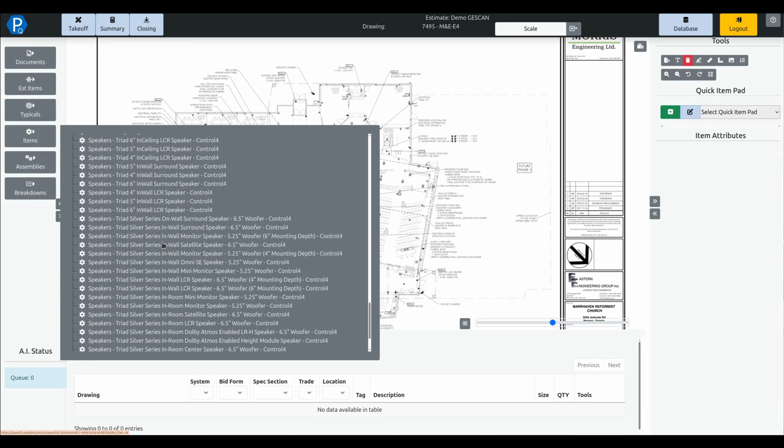And this comes tied in with Gescan pricing, tied in with labor units, all of that sort of data that you need to put together a comprehensive estimate. And we are continuously adding to this. So we just recently, for one of our clients, loaded up a whole bunch of new speakers and all that kind of stuff for home automation in here. So again, if there's anything missing in here, we're happy to plug things in for you, and we don't charge our clients for this. You can customize anything yourself in here.

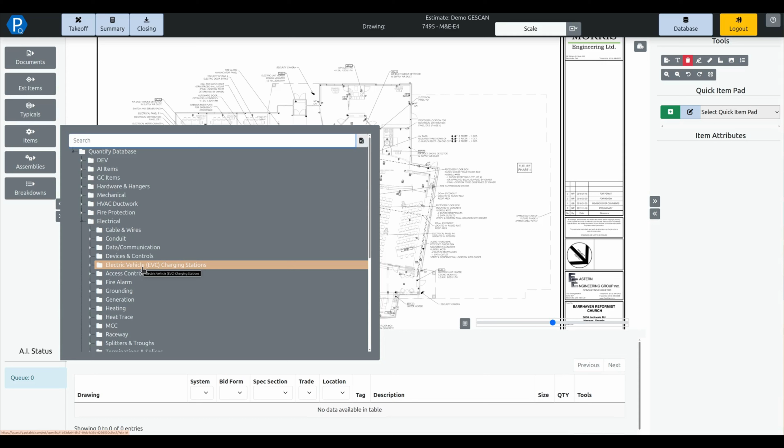Anything that a contractor does in here is locked to them. Nobody else can see it or touch it. If we load something in, it does go to the global database. So this is continuously expanding. EV, solar, all of that is being wrapped into the platform effectively in real time. The same goes for our assemblies. Our assemblies are formula driven. So if you know a little bit of Excel, you can build very powerful assemblies.

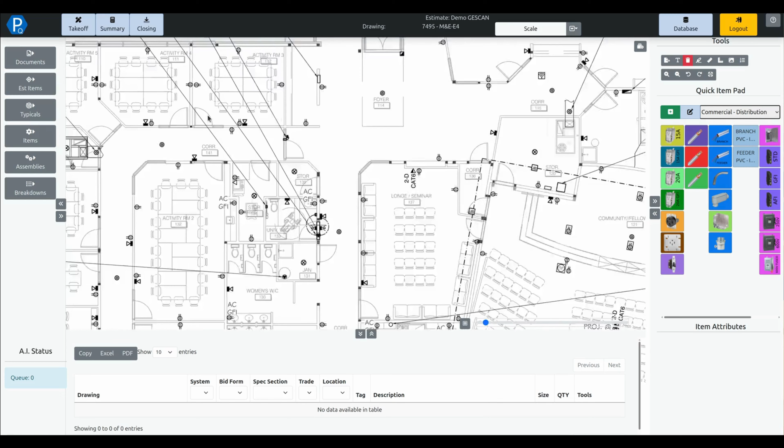On the right-hand side here, we've got our quick item pads. These are shortcuts into the items and assemblies databases and are there to speed up your takeoff. And so to get some information in here, I can click on one of these buttons if I want to go and count these 15 amp receptacles. And it's going to ask me some questions. What do I want this to be in the platform? I can select the gauges here. I'm going to put a 10-foot whip on this. And then I'm going to highlight this. And I can go and manually count these.

If I really hated my life, didn't want to spend any time with my wife and kids, I could spend my whole day counting these widgets. I personally don't find that very fulfilling.

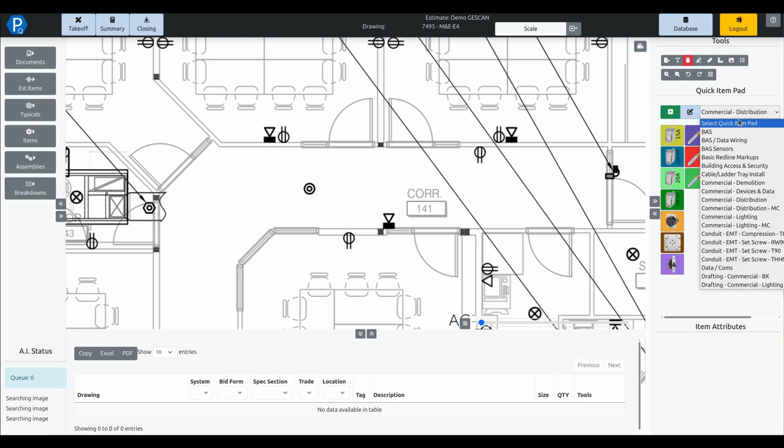In here, we have added in our AI. And we've been working on improving this in a number of different ways. But I can click on this little yellow icon here, and I can simply go and highlight this receptacle now, hit commit, and that's going to send it off to our servers, and they're going to take over and start doing the counts for me. While that's going on, I can queue up other information here. If I needed to take off these fire alarm strobes here, I can send those in.

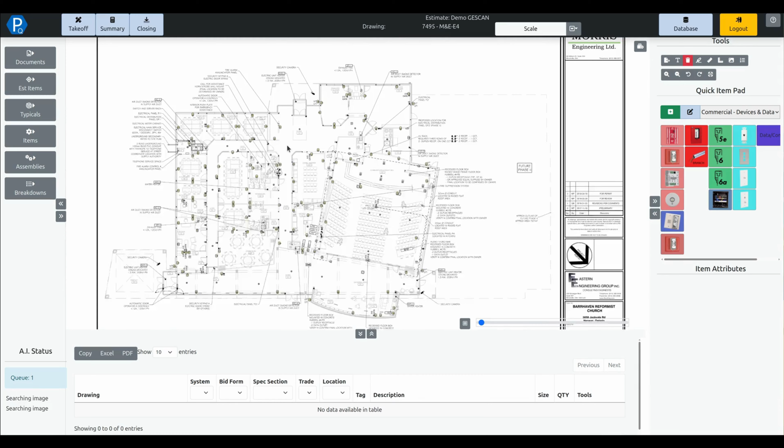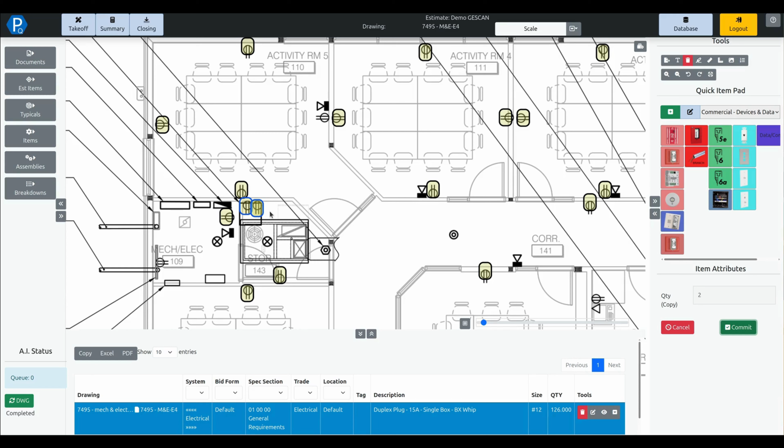And it's basically going to just crunch through until one of these is finished, and then I will get a green refresh button here. When I receive that, I can click on that button, and it's going to reload the drawing and show me everything that it's picked up. It's not 100% perfect, but it's there to speed up the estimator. Anything that is missed in here, I can simply right-click, copy, and paste this in. And so when I paste that in, I'm able to very quickly capture anything else that is needed in that project. And we can see here that I've got the other fire alarm devices all captured in here.

What we have in here to break out your estimates, we have these breakdowns here, and these become very powerful depending on the nature of the estimate that you're doing. Now, this was pre-populated with the default template that I used to open up. And so I've got different systems in here.

Now, in my audit trail here, I've taken off some distribution, I've taken off some fire alarm, but I've never really assigned these to any systems. I can go back and I can fix that now. So I can right click and reassign this and put it into my fire alarm system. I can do the same thing for this one here, reassign this and put it into my distribution. Now, usually you would organize this, if you excuse me for 1 second.

Ha, a little bit of allergies kicking up there.

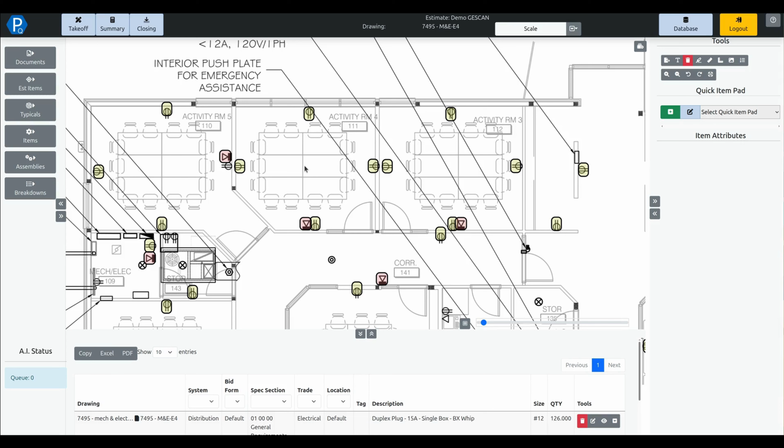Usually you would organize this as you're doing your takeoff. And I'm not diving into a ton of detail on this, but what I do want to talk about is those instances when you're bidding and the contractor, the owner, somebody comes back to you with an addenda. Usually it's 24 hours before the job closes, and they say something like they want to see one of these rooms broken out.

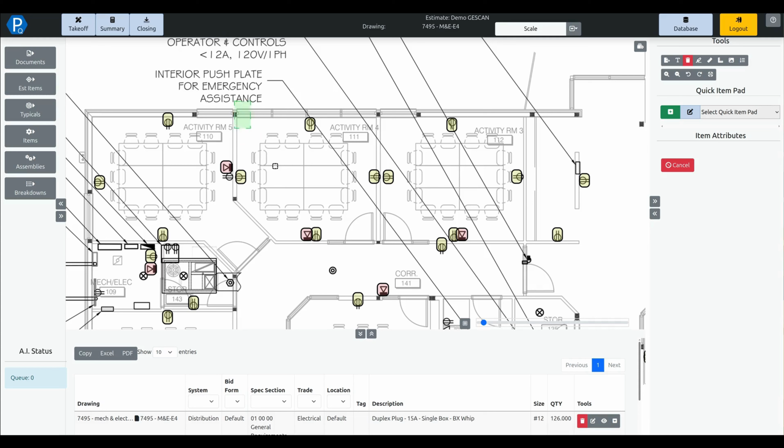And so if the owner wanted to see what activity room 4 was worth, we have a new feature here where I can go and add in a location for that. So I'm going to call this activity room 4. Save that. And because we are very focused on the documentation, I can right click on this and I can use our multi-select tool. This is a new tool that we have, and I can highlight everything that's in that room. And then I can right click on this and select reassign. And in this case, I'm going to select my activity room 4 breakdown.

And when I do that, the system is going to go through now and it's going to break out all of the associated lines of takeoff so that I now have this new activity room 4 breakdown. And this becomes incredibly powerful again as we're going through these kind of detailed estimates with that ability to react very quickly and see what's in that room, what's associated with just that, as the owners are sending us those breakouts. It doesn't happen all the time, but it can happen. And when it does, it's very, very painful to try to break that sort of information out.

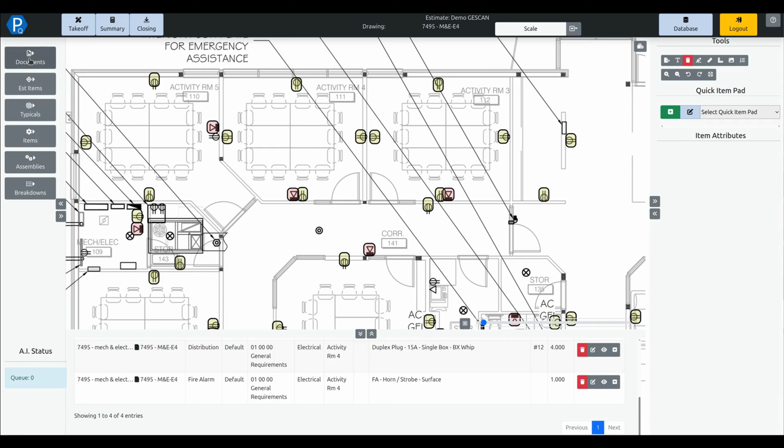On the drafting side of things, we've been improving the drafting module in the platform. So we have these drafting quick item pads in here. We've significantly expanded the number of quick item pads and what you can do with those. But effectively in the drafting, if you're in design build here, you'll receive a floor plan and basically be told, give me a full electrical price for this. And this can be done with averages, square footing, that sort of thing. But it's really hard to communicate and minimize risk when you're doing it that way.

So what we have in our drafting module is this ability to place the symbols right on the drawing, make allowances for different things in here, click commit, and it's going to put those symbols on the drawing. But it's not just putting symbols on the drawing, it is tying in all of your information, everything that you need, pricing, labor, everything that you need to install what is on that drawing. And it is tied together. So when I click on the row in my audit trail, it's going to highlight everything associated with that.

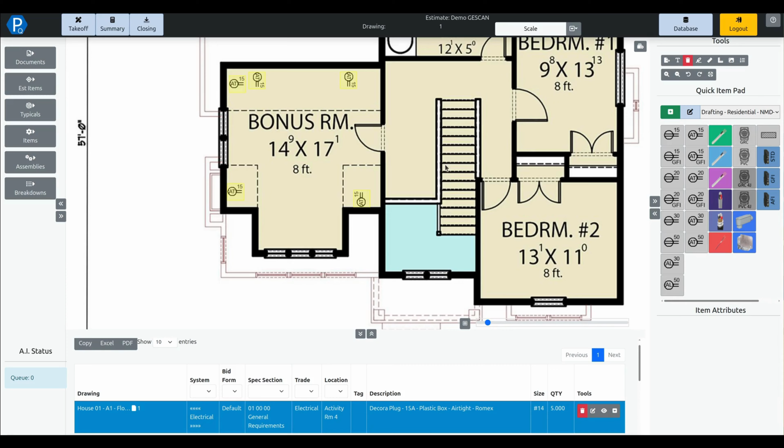What we've also been adding in here is the ability to put a legend on these drawings. So this is a very new feature from a month or so ago, but in the top right, we have this add a legend to the drawing. And when I click on that, it's going to ask me where I want to put it. I can put it anywhere, and then I can move it. But what this lets me do is place an interactive legend on the drawing. So this is going to update if I bring it down here a little bit closer so that we can see everything kind of all together here.

If I'm adding some lighting in here, for example, I want to use my drafting one on this. Let's throw in some light fixtures. I'm going to turn on a grid here, and I'm going to throw in some downlights. They'll be 4-inch downlights, and then I want to call these type A's, or I can even say bonus room, that sort of thing, something to identify these. And then when I bring this over, I can place these lined up to the grid into my drawing here.

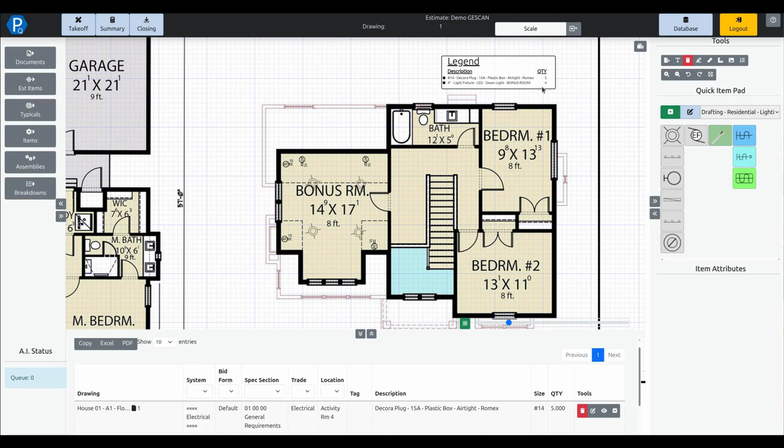And then when I hit commit, it's going to automatically add them into that legend up at the top, along with their quantities. So when I go and share this with the client, whether I'm doing a large design build or something smaller, residential, I can very clearly communicate the information that I need for those clients. We are also putting in markups, red lines, all of those sort of things in here.

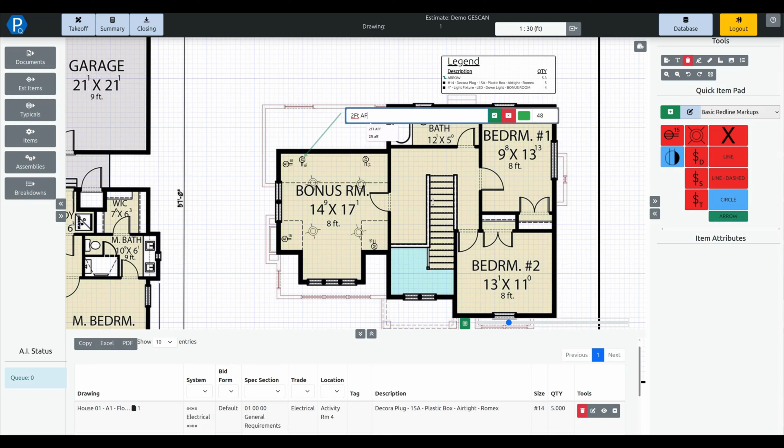So if I come in and take a look at our new redlines markup capability here, I can add in arrows and point those to wherever I need to, add in annotations in here, 2 feet above the floor if I need to tell them that for that receptacle. And we're working on actively making this a lot more interactive for communicating the information that was in the basis of the estimate. And so that's on the drafting side.

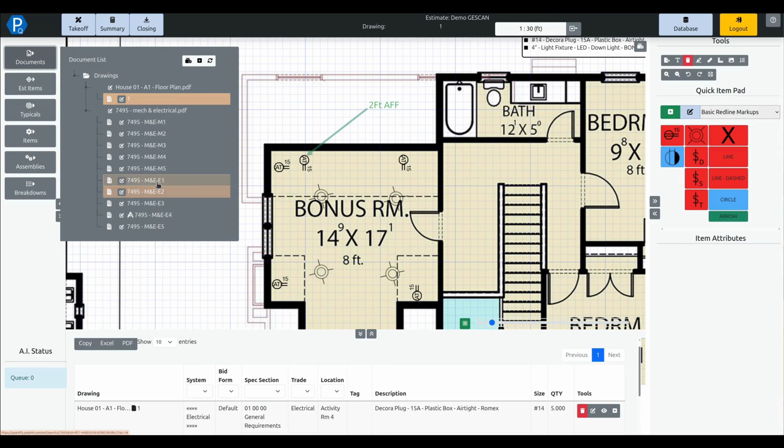Going back to things like lighting. So if you're on a commercial project or if you're on an industrial project and you get a cable schedule, those sort of pieces, we have a new feature built into the AI here so that we can use that to extract data out of tables in the documentation.

So what I'm going to do here is I'm going to go after these light fixtures, for example. I'm going to hit a new folder in here. I'm going to use my typicals for this, and I'm going to call this my light fixtures. So I have a folder in here. This could be a cable schedule. I could call it my cable schedule. Anything of that sort of nature.

And now I can use this button up here to extract a table from a document. This can be drawings, specs, whatever I have in here. And I can simply highlight this table here, tell it that I want to call this a light fixture, and send that off. And that's going to send this table over to our AI, and it's going to start pulling this apart for us. And it's going after the tag list here. So again, this is awesome for light fixtures, equipment, componentry like that, cable schedules, etc.

And when I refresh this, it's going to show me everything that it's found. There's a couple in here that it missed. I can add those in myself. But what I have in here now is that preliminary list of tagged items. And I can now go and start to immediately take this off.

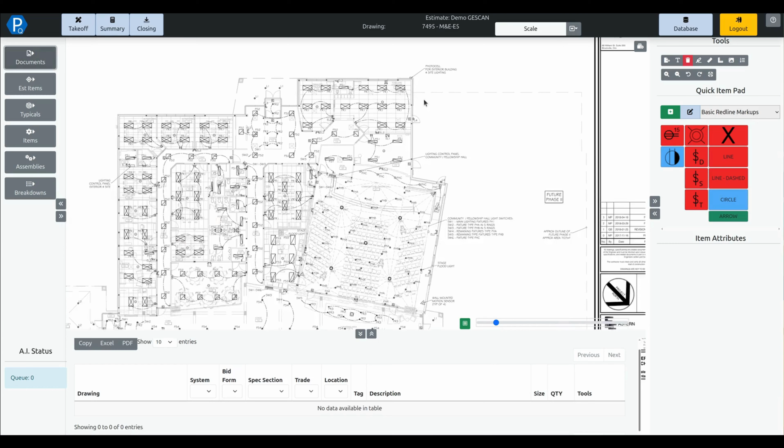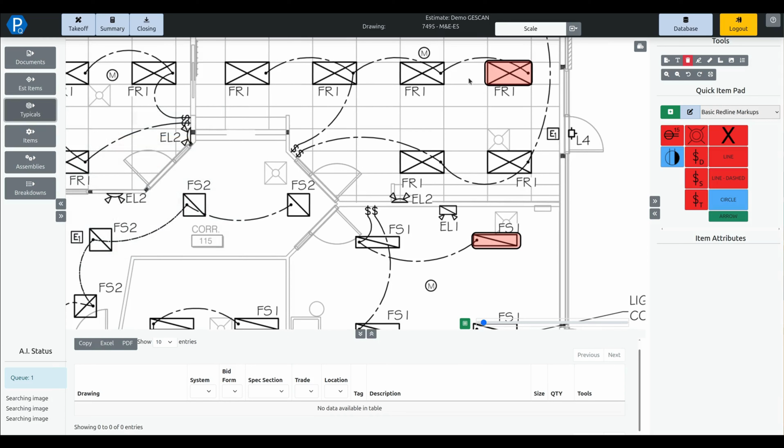Since I'm doing lighting here, I can dive in here and I'm going to use the AI to count these for me. I'm going to start to send that over and the AI is going to start pulling this apart for me. While that is going on, I can queue these up, but I can now go and take a look at one of these. So this FR1, for example, that we're looking at here, it's a 2x4 light fixture. When I go and right click on this and edit the typical, I have my tag in here.

So what we're doing is we're trying to get that tag list out to Gescan as fast as possible so that they can start to get the quote going for that. So that's kind of our A materials quotes that we're going out for with this. And we're trying to speed up that process.

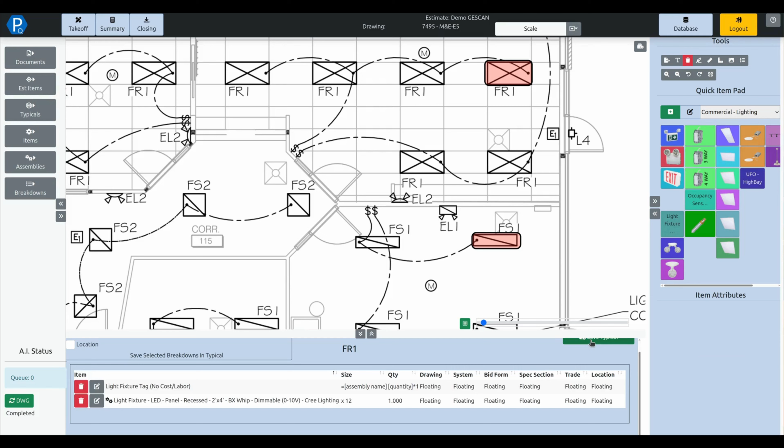But once I've gotten through my counts or at any point while I'm doing this, I can flip over to my lighting assemblies here and I can bring in my 2x4 lighting assembly. I don't need a tag on it because that's already in my typical, and I just need one of these. And when I commit that and save that, it's going to go through my estimate and update every instance of that FR1 now with that assembly.

So now I have, again, all of my commodity materials to wire up that fixture, my labor, everything that I need to install that. So we've done some high level, very rapid fire takeoff to get information into this estimate.

Where this becomes incredibly powerful is when I click on summary here. The system is going to go through now and show me the entire bill of materials for this project. I've got my labor hours in here, I've got my material pricing in here, and I've got my Gescan pricing coming in. And this is my real-time pricing. I can replace things in here. If there is something that is missing a price, I can simply type that in and it's going to highlight that row yellow for me.

Because the platform is full multi-user, you can have multiple estimators working in the estimate at the same time. And so it's going to track what everyone is working on as they're going through. So if somebody were to accidentally override something in here and put some sort of wrong value in there, I can very quickly see that that has been touched, that has been edited. And if I disagree with that, I can simply right click and reset the row. And that's going to put it back to whatever is the default pricing in my database.

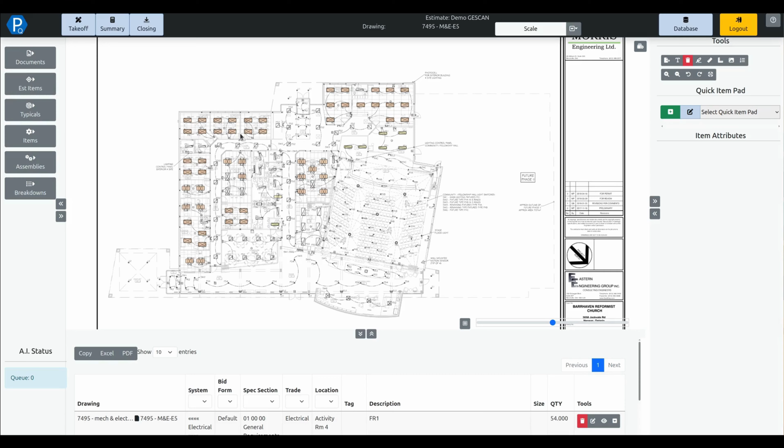Can you break out your BOM to send RFQs to different favored vendors? Yes, that becomes part of the packages module here. If I jump into closing and go into packages, lighting is a common one for this. This list of packages came out of my template, but here's a pre-structured lighting package that I have.

I've got my Gescans, my EECOLs, my City Electrics, Rexel, anybody that I might be sending this out to. I can delete people that don't apply, but here I can type in a tag and pull out that fixture count, then assign it into my package. I can add several other line items here, so if I want to make sure they include delivery, shop drawings, those sort of things, I can put all of that in, and then click download BOM.

This creates an Excel spreadsheet I can email out to my suppliers, with everything in there, including my project closing dates. Again, this is simply the default template from the platform — you can tweak it to your company, format it however you want. But it leads to consistent requests for quotes, so I can send this out to them as my RFQ and save this. It's going to sit here until those quotes start to come in.